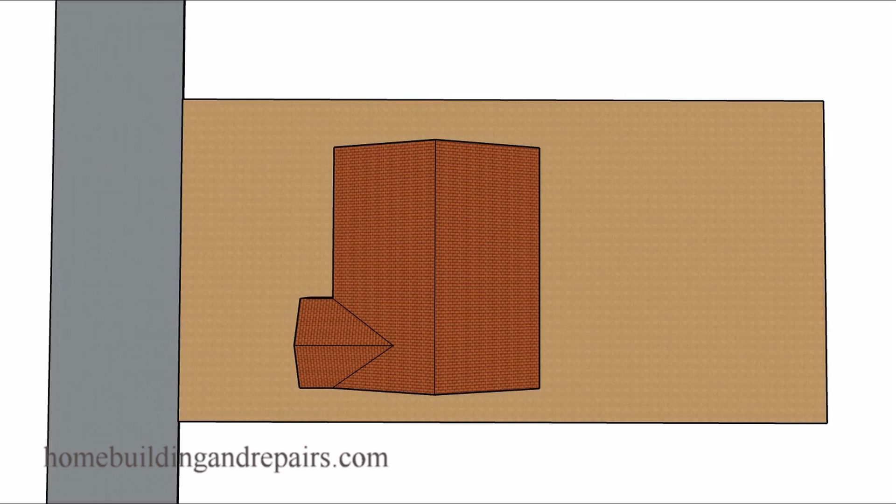In this video, I am going to talk about probably the second biggest problem you're going to have if you put a granny flat in your backyard. And of course, the first biggest problem will probably be building permits, building planning department, and getting the project through their list of mind-numbing obstacles.

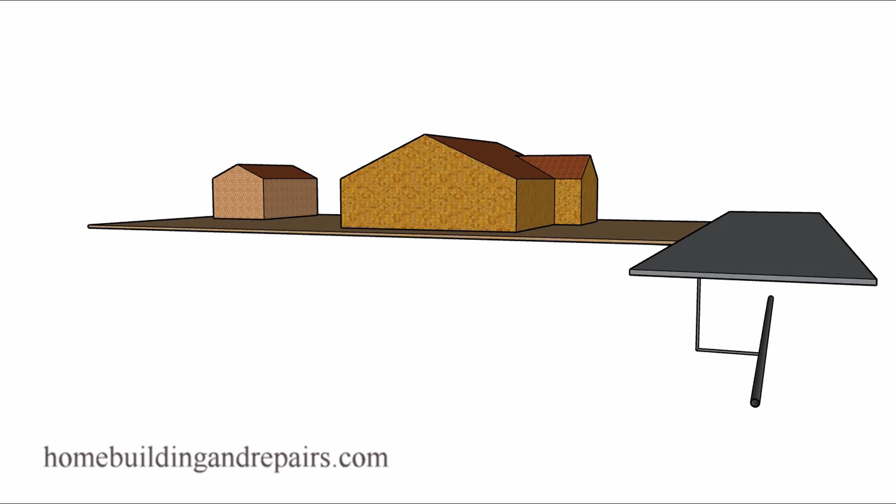And I'm not even going to go into the amount of money that you're going to have to spend for something like this. But with that out of the way, let's go ahead and get to our problem, and that is going to be plumbing, underground plumbing, the waste pipe plumbing system.

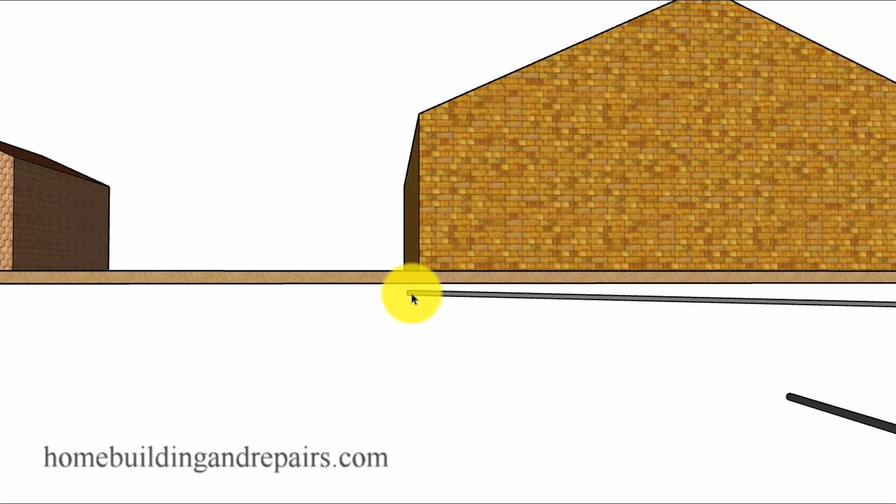That will be the fact that the end of the waste line is usually going to be at the minimum height it could possibly be buried in the ground at the back of the house. However, if it's running from the front of the house to the back of the house, you can stop watching this video right now because you're going to be able to tie into it quite easily. But that isn't going to be the standard.

Most of the time it's running from the back of the house to the street or towards the front of the house. And if you need to extend the plumbing drain line and you have a situation like this, then you could run out of room. You could actually create a problem to where the pipe would be either too close to the top of the soil to be approved by your local building department, or you could actually have it sticking out of the soil and it definitely wouldn't be approved by your local building department.

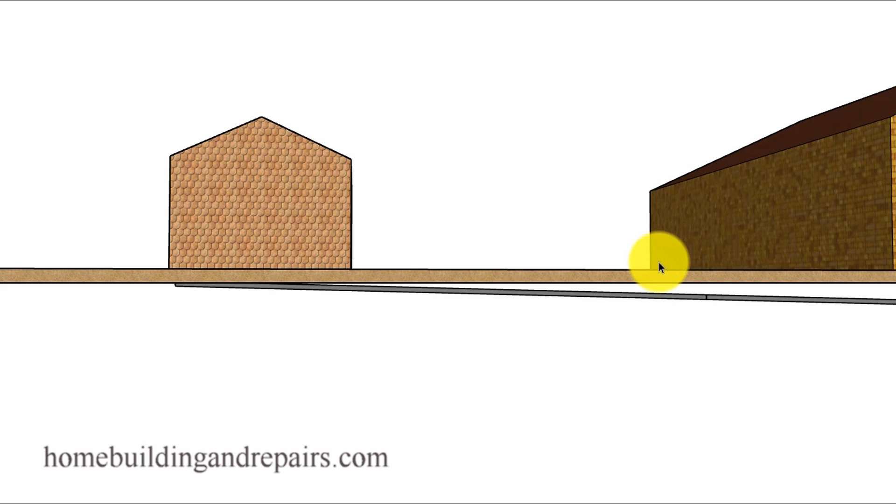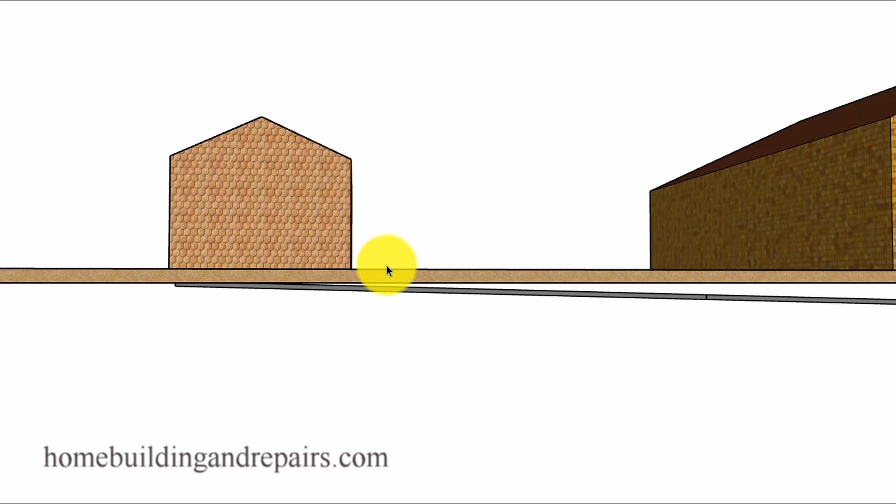Now, there is one more thing I'd like to point out when looking at this picture, and that would be the fact that your property might be sloping from the back to the front, and this usually allows the water to drain to the street and then down the street to the storm drain system. And if this is the case, then your pipe might be sloping the same distance as the top of the soil and you wouldn't have a problem. So again, another thing that you would need to consider.

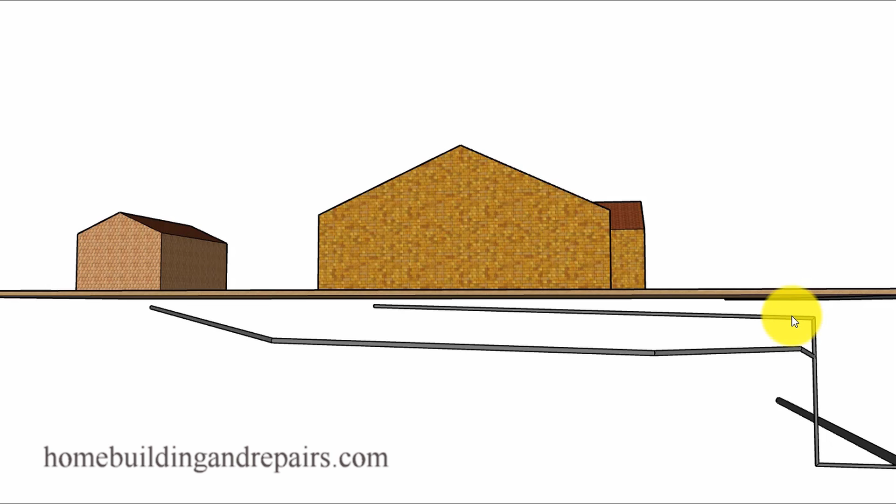And of course, if you cannot connect to the back of the house, you are going to need to install a new plumbing waste line. And that line is going to need to connect into the existing sewer somewhere. And this is where it could really start to become expensive, especially if the connection you need is somehow underneath the street.

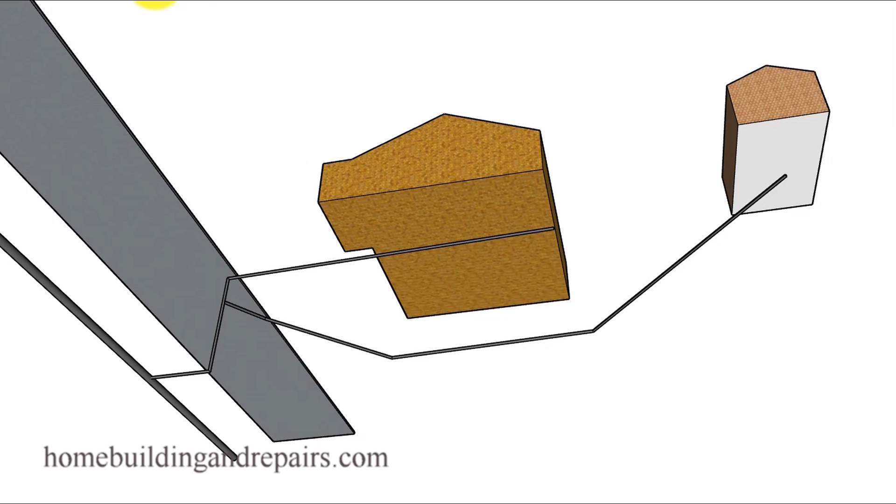But hopefully you won't have to go that far and you will be able to connect it somewhere on the property. And of course, the next problem will be all the obstacles that you could run into. For example, you will be digging a trench around your property because it's not going to make a lot of sense for you to go underneath the house with your plumbing, tearing up your building foundation. It's going to make a little more sense to go around the house. And of course, this could be either side of the house also.

A view of it from the bottom there, just trying to give you an idea of how the pipe is sloping in hopes of explaining something that makes sense. And of course, I have this drawn in here. Your pipes could be completely different. You could be coming off of here at a 45-degree angle, or this could be a little closer or a little further away. Just trying to give you an idea.

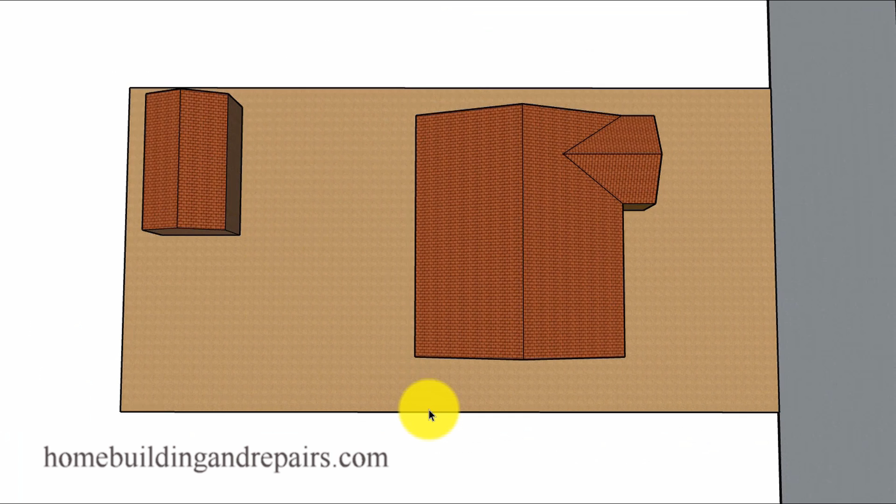You're not going to be able to look at this and say, hey, I'm going to be able to do this exact same thing. And for those of you who don't really understand what I'm talking about when I'm talking about a trench, this trench could start at 2 feet here, and then that could be the highest spot.

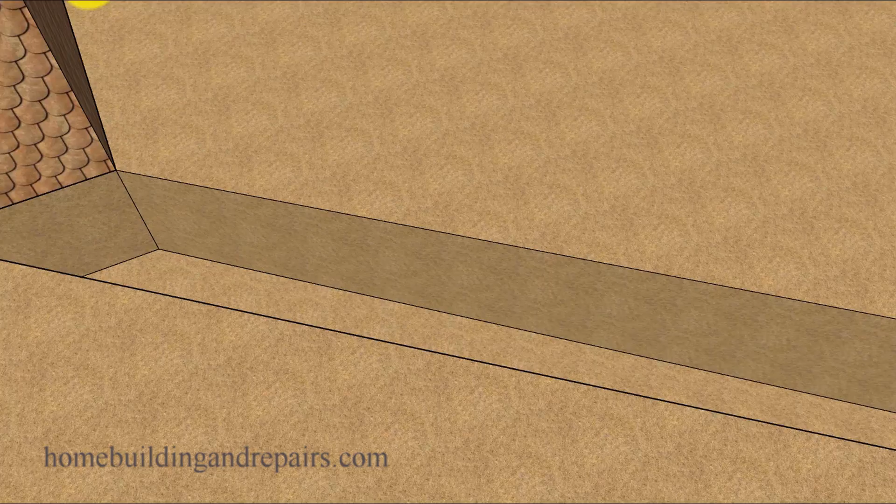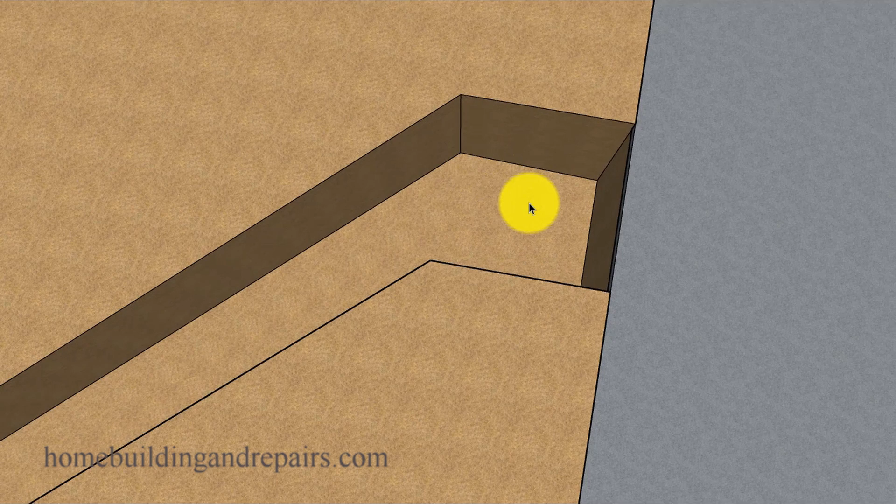Everything there would be sloping 1/4 inch per foot or 1/8 inch per foot, depending on what size pipe you're going to be using, until you eventually get to the spot where you'll have to dig a giant hole if you can't find that plumbing pipe, and I've had to do that before.

Now, enough of the bad news. What would the trench look like if you could connect to the back of the house? It would look something like this. You would simply dig a trench down to where your plumbing pipe was, and maybe an existing cleanout would give you a clue, or you might have a bathroom in the back of the house.

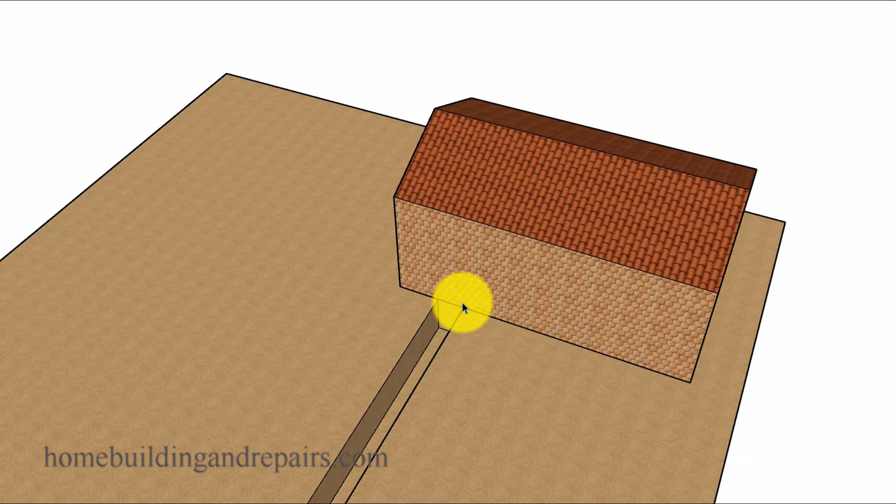And of course, that would be a good place to start. Then you would simply dig a trench to the granny flat or tiny home, whatever you're building back there. And something else that could save you a lot of money would be to simply raise the height of the building and bring some more soil into the back of the property if the pipe wasn't deep enough in the soil, or if you simply needed a few more inches, or in some cases even a foot.

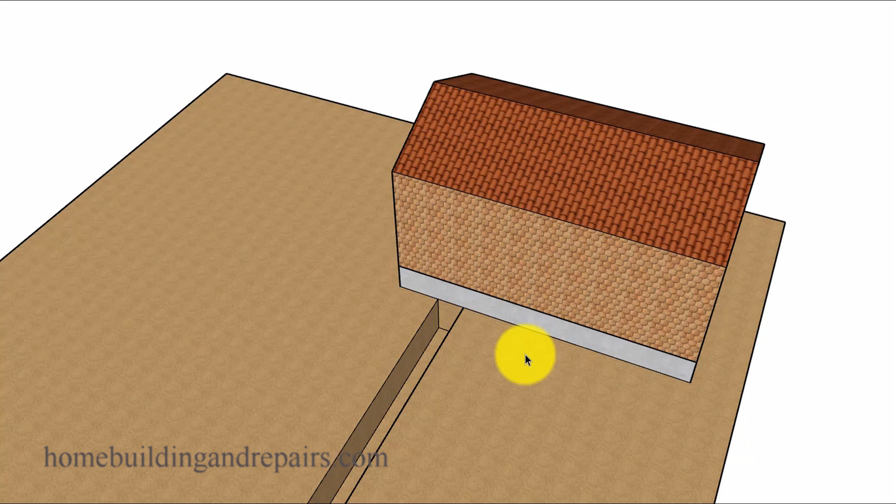You could simply raise the house and then put a couple of steps or a small stairway going up to the front door. Again, I'm just throwing out a couple of options here, because if I had the choice, I would definitely raise the house instead of digging that big trench and trying to find the main sewer pipe, going around all the other obstacles that would be required, like sidewalks, driveways, and of course big trees, to get a new plumbing pipe in.

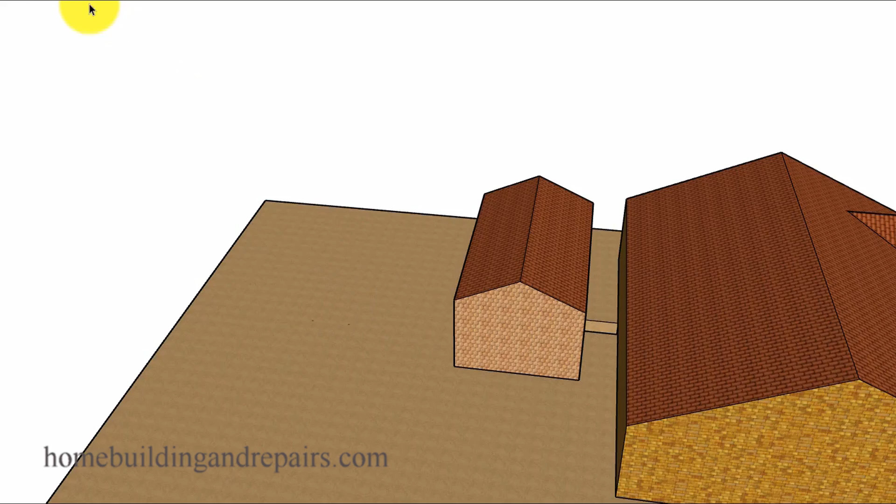Another idea, and this might not be feasible, would be to move the building a little closer to the house, maybe everything would work out a little better. But of course you would have to make sure that your planning department would approve something like that.

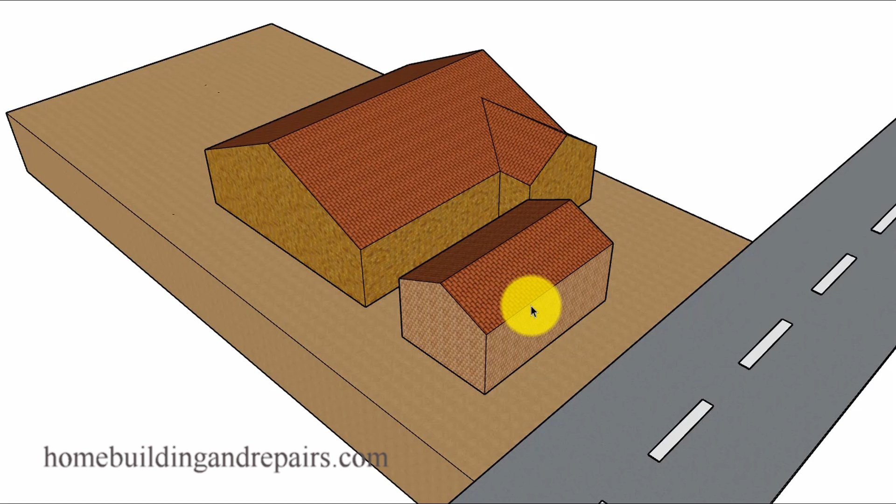And even though something like this might not be feasible, you could always put it in the front of your house. But again, this is something that would need to be approved by your local planning department, because most of the time we have easements that require a minimum distance to the front of a building, the front of your home, and possibly the center of the street. And of course, that would be something your local planning department could help you figure out.

And the last couple of items I want to mention in the video would be to make sure that you are on a sewer drainage system and not a septic tank. If you have a septic tank and a leach field, then there's a good chance you're not going to be able to build your tiny home or granny flat over the leach field. So keep that in mind also.

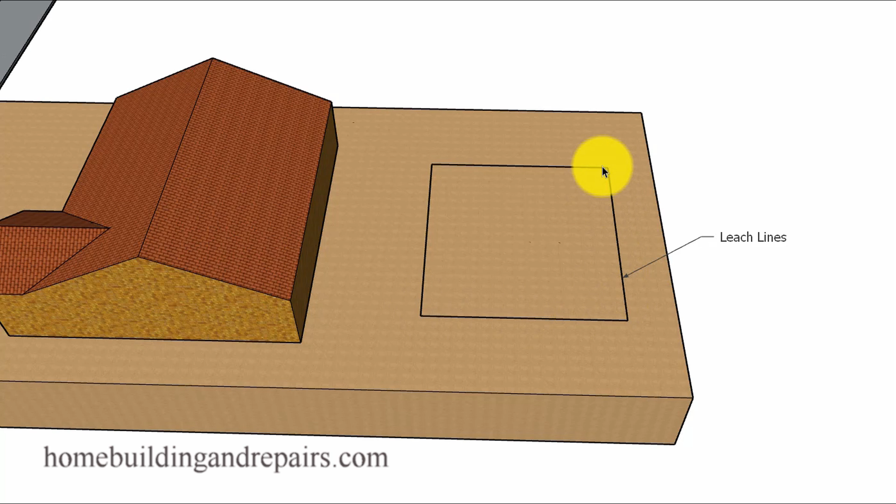And the last thing I want to point out, even though I already mentioned this in the video, would be if the sewer pipe was located in the back of the house, maybe you have a back easement and maybe even an alley, something like that. If that's the case, then as I mentioned earlier, you would be able to tie into this a little easier, if of course the building was going to be located in the back and not the front.

And that brings us to the end of the video.